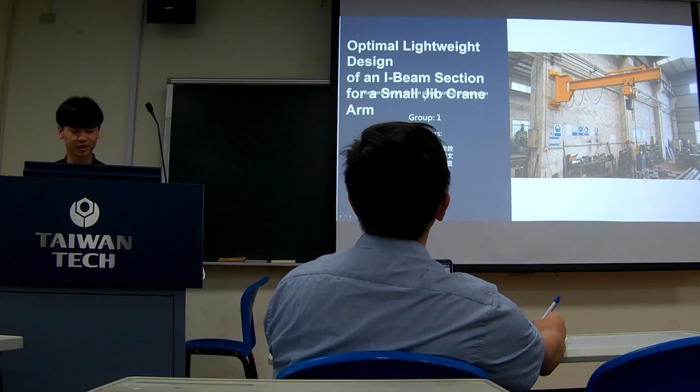Small jib cranes are commonly used in factory and repair areas and workstations for lifting and moving parts. However, if the crane arm is over-designed, it increases material cost and also increases the load on the column and rotating base. On the other hand, if the arm is under-designed, it may cause excessive stress or tip deflection. So the goal of this study is to reduce the arm weight while keeping the stress and deflection within allowed limits.

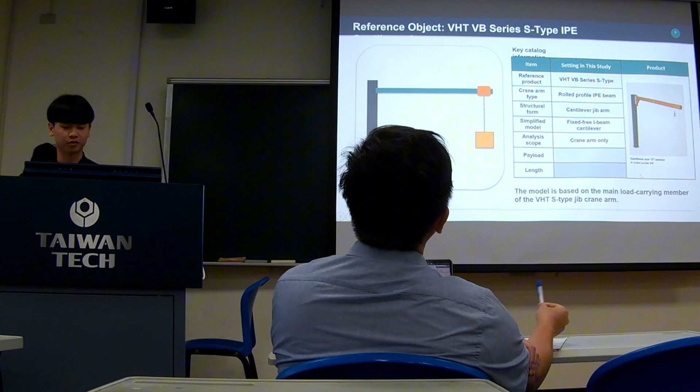To make the problem closer to a real engineering case, this study refers to the VHT VB series S-type jib crane frame. According to the catalog of this frame, the S-type arm is a cantilever beam made of rolled profile IPE, and the trolley runs along the IPE beam. So this beam can be regarded as the main load carrying member of the crane arm. Therefore, in this study we only focus on these horizontal IPE arms and simplify this as a fixed I-shaped beam cantilever.

The complete jib crane frame includes many components, such as the column, rotating support, trolley, hoist, bolt, and wheel. In this proposal we simplify the system and focus only on the crane arm. The column or wall support is treated as a fixed boundary. The lifted load is modeled as a concentrated load, and the beam self-weight is modeled as a uniform distributed load. This simplification allows us to build a clear analytical model for optimization.

Next, we define the loading model. For a cantilever beam, when the load is moved further from the fixed end, the bending moment and tip deflection become larger, and therefore the trolley and the hoist are assumed to be located at the free end. This represents the worst case loading condition.

Based on jib crane frame design guidance, the design load includes the rated lift load, plus 15% of capacity for trolley and hoist weight, and 25% for impact allowance. Therefore the equivalent end load is defined by the formulation shown.

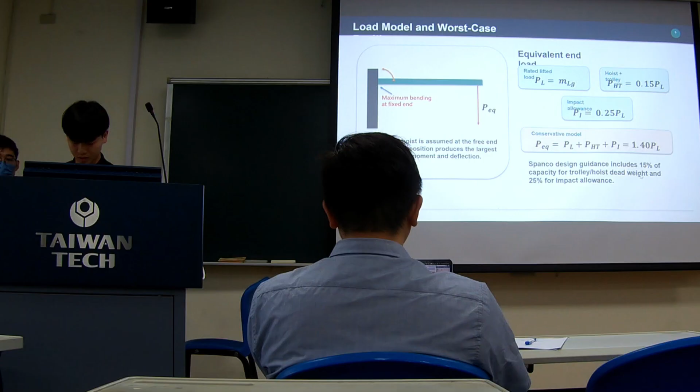After defining the load, we define the design variables. The I-shaped beam section is described by four main geometries: section height h, flange width bf, flange thickness tf, and web thickness tw. These variables directly affect the cross-section area, moment of inertia, and bending stress.

The cross-section area and moment of inertia equations are based on the standard composite area method for I-shaped sections. The I-shaped section is divided into two flanges and one web, and the moment of inertia is derived from the standard rectangular moment of inertia formula. Therefore, these equations are used as the geometry basis of the optimization model.

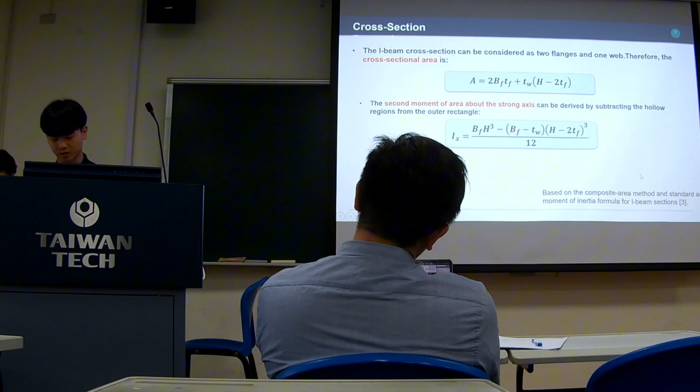The beam weight equation is based on the basic mass density volume relationship. Since the material density and beam length are given, the beam mass can be calculated from the cross-section area, and the self-weight of the beam is then modeled as a uniform distributed load along the arm.

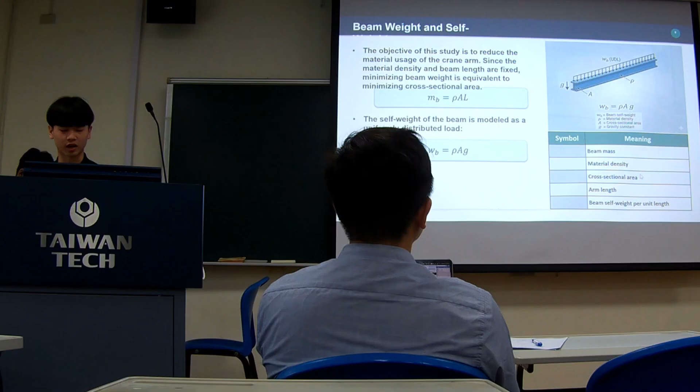The stress equation is based on Euler beam theory and the standard flexure formula. Since the beam arm is simplified as a cantilever beam, the maximum bending moment occurs at the fixed end.

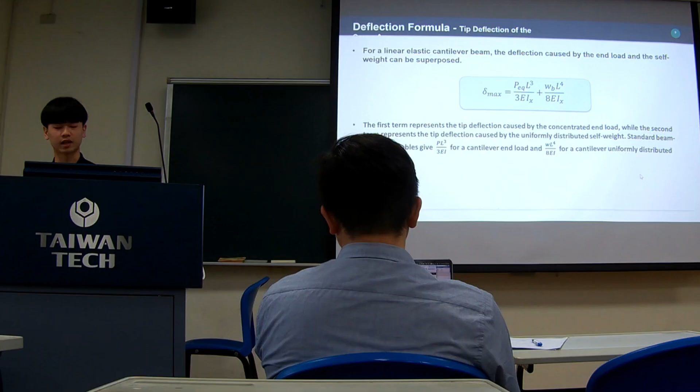The deflection equation is based on the standard cantilever beam deflection formula. The first term comes from the concentrated end load, and the second term comes from the uniformly distributed beam self-weight. Because the model is assumed to be linear elastic, the total deflection can be added by the superposition principle.

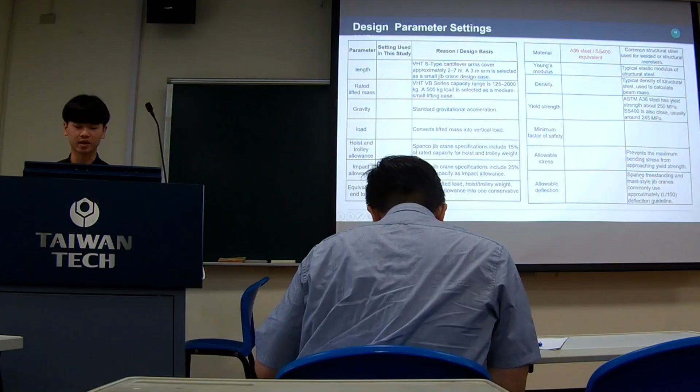This page shows the numerical settings used in this study. The arm length is set to 3 meters because the VHT S-type arm length range is about 2 to 7 meters. The rated lifting load is set to 500 kilograms, which is within the VHT capacity range, representing a medium-small lifting case.

The solver used in this study is sequential quadratic programming, or SQP. This problem is a nonlinear constrained optimization problem. The design variables are nonlinear, including h, tf, bf, and tw. The objective function and constraints are also nonlinear because the moment of inertia, stress, and deflection all depend nonlinearly on the section dimensions.

So SQP is suitable for this type of problem because it is designed for continuous nonlinear optimization with constraints. Compared with random search methods, SQP is more efficient for these small scale engineering design problems.

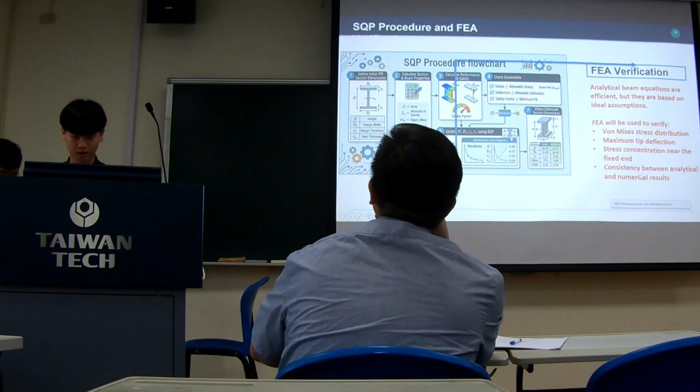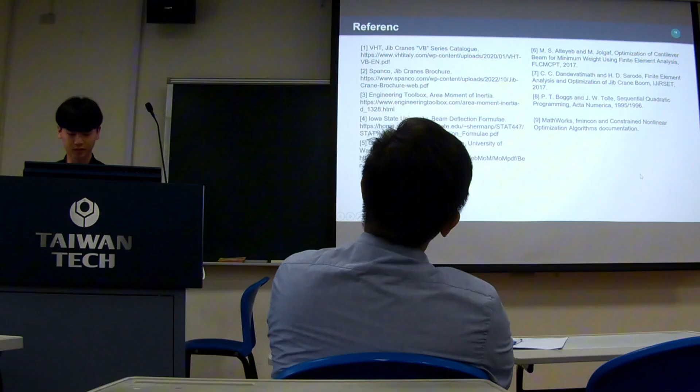We expect the result is that the linear-optimized I-beam arms will have a lower mass than the original design. However, after optimization, the... calculating the reliability of the optimized design. This is our reference. Thanks for listening.

Of course, this is a problem that you can solve, but I think it's a little simple because for I-beam geometry, there are already given equations. So if I have those equations and put them in MATLAB, I can complete this within an hour, right?

So I think it's a little simple. Since you are interested in structural optimization, I recommend you look into something called topology optimization. In our lab, we have software called HyperWorks. I think Shanisa is using it. That software has topology optimization.

Topology means towards geometry. So topology optimization is a kind of method that will generate a very unique design, like art. So you can Google for it, and there are actually some free software options on the internet.

The design is strictly regulated by international ASME standards, and rigid safety margins often led to over-designed structures. Our goal is to minimize the overall cost while ensuring 100% compliance with non-linear safety requirements.

To define the problem, we have a design vector X composed of four variables: X1, X2, X3, and X4. X1 is shell thickness, X2 is head thickness, X3 is inner radius, and X4 is cylinder length. X1 and X2 are discrete variables, while X3 and X4 are continuous.

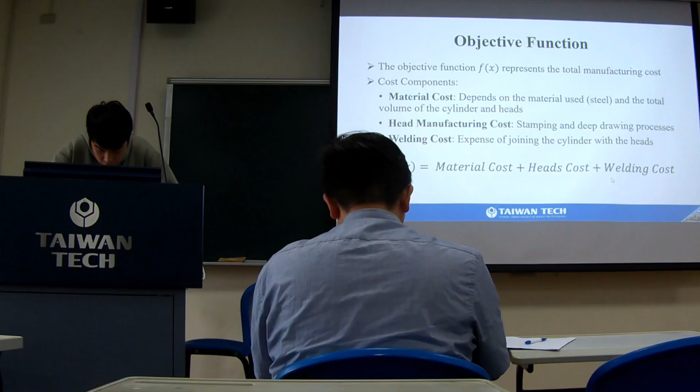Our objective function represents the total manufacturing cost. We've broken it down into three primary factors: the material cost, which depends on the volume of steel; the head manufacturing cost, which involves the stamping process; and the welding cost for assembly. So minimizing the function f(x) is our primary goal.

This is the table we use. This table sets up industrial benchmark parameters to connect our theoretical model to a computable simulation, and these are fixed parameters from Sandgren's study.

We use C1 to C4 in our cost equation. C1 is the shell material factor, C2 is the head forming factor, C3 is the welding factor, and C4 is the circumferential weld factor.

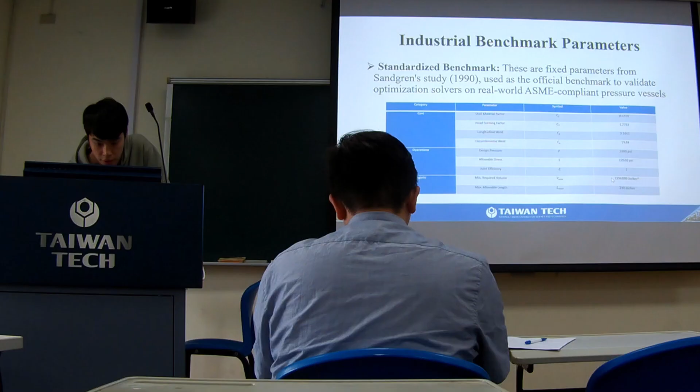To make the problem computable, we adopted the industrial benchmark parameters established by Sandgren, and by substituting these coefficients into our model, we derive the exact cost function shown here. This formula allows our solver to evaluate the exact cost for any given point in the 4D search space.

We also have some design constraints, and these four constraints are non-linear. The first two, G1 and G2, are derived from the ASME resistance formulas to prevent failure under external and internal pressure and stress. G3 ensures we meet the minimum operational volume requirement, and G4 is about the maximum allowable length for transport logistics.

For the solver, we decided to implement Particle Swarm Optimization, PSO. That's because classic methods like Newton's method or steepest descent fail, since this problem has both continuous and discrete variables. Particle Swarm Optimization fits this problem well, and also because PSO doesn't need gradient information, this method is robust, efficient, and suited for exploring this complex search space.

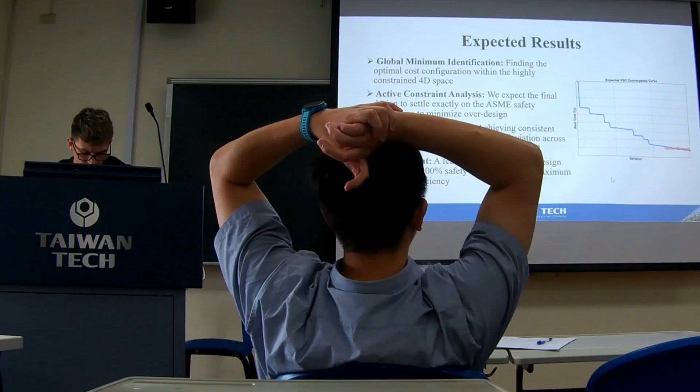We expect to identify the global minimum cost, and the optimized design reliably settles exactly on the boundaries of the shell, satisfying the constraints we explained before. This means we will eliminate all unnecessary material weight while maintaining the exact safety factor required by the code.

Can you move back to the prior formulations? One more.

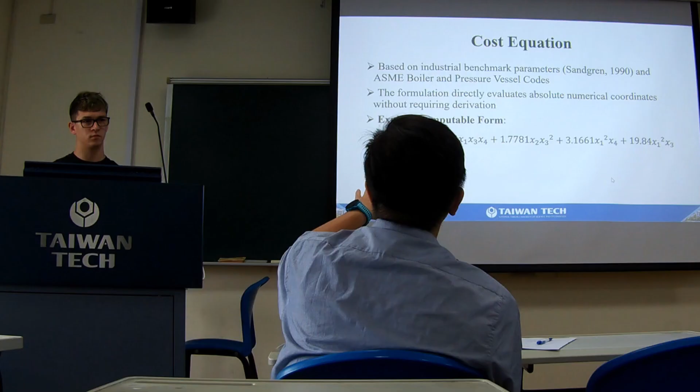So all of your X variables are basically geometrical parameters. And from the objective function, it's a very nonlinear problem. Let's go to the next page.

So these are some physical constraints. Some of them are nonlinear, some of them are just linear equations. Please go forward. So from here, your statement — the first statement isn't quite appropriate for your slide, because you mentioned that a gradient-based approach is not good for discrete variables. But in your problem, is there actually a discrete problem?

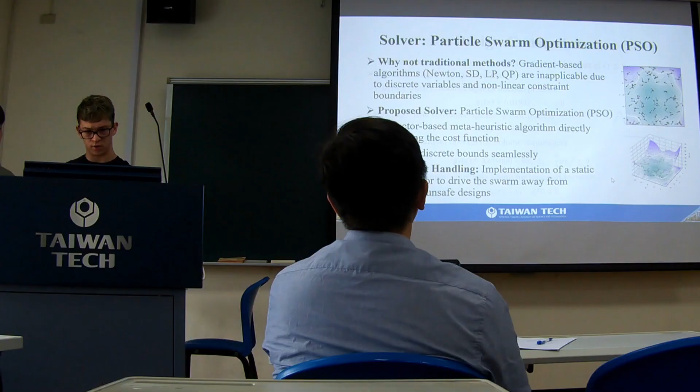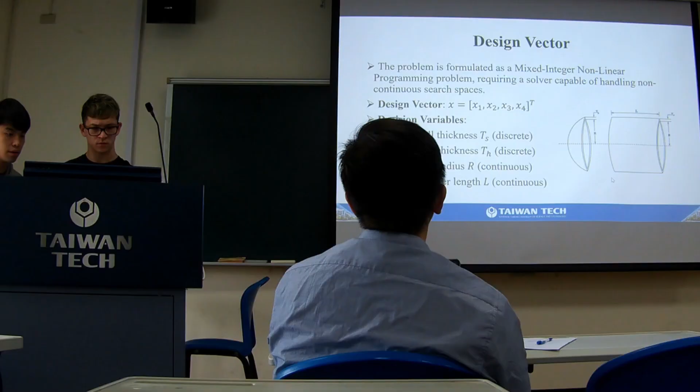No, the first two are discrete. Can you show the first two? Shell thickness and head thickness are discrete because they follow commercial sizing — you can't buy every size you want, you need to buy from fixed sizes. Then the inner radius and the length are continuous.

Yeah, but thickness is something that you can solve as continuous. This problem can easily be treated as a continuous problem. For example, if you're designing gears, the number of teeth is definitely discrete. So usually when people solve this kind of problem, they just treat everything as continuous, and then once they find the solution, they choose the closest valid value.

In your optimal design, for every x1 and x2, you'll have one design that's slightly thicker and one that's slightly thinner, so you're not sure if rounding up or down will violate the design constraints. But once you get the optimal continuous x1 and x2, you can try four different combinations — maybe some will violate the constraint, but some won't, so it can be easily solved. With that consideration, this problem becomes quite simple.

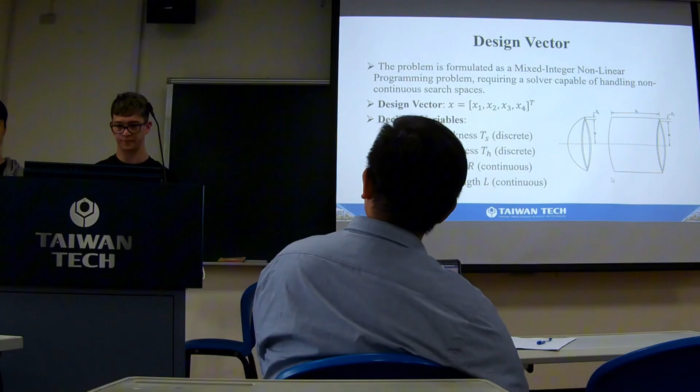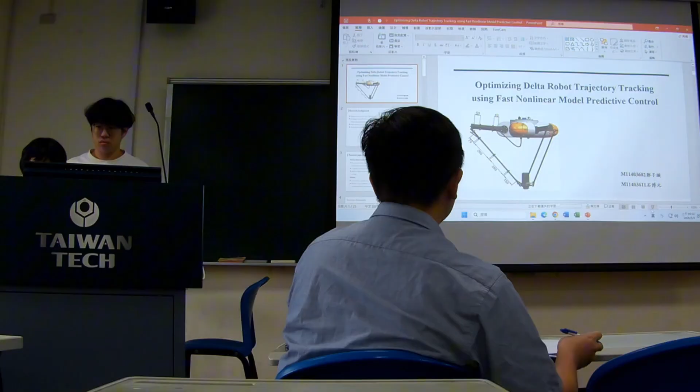Our topic is about optimizing Delta robot trajectory tracking using nonlinear model predictive control.

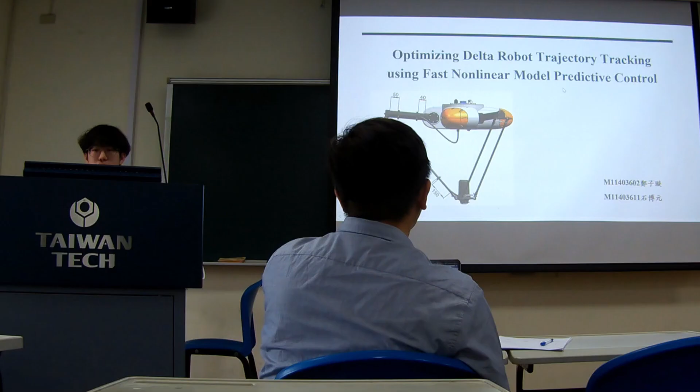So a Delta robot is a type of parallel robot. Unlike traditional serial manipulators, the Delta robot design has all driving units mounted on a stationary overhead base that drives the moving endpoint at the end via a closed kinematic chain. By fixing the drive motors to the stationary base, the moving part does not need to carry the weight of the motor itself, and this design significantly reduces the inertia of moving components, enabling the platform to achieve high movement speed and acceleration, making it the ideal choice for high speed pick and place operations in industry.

However, the mechanical structure of this closed kinematic chain is accompanied by strong nonlinear characteristics and high cross coupling between axes. This means that the dynamic response of the machine is not only nonlinear, but the forces acting on the various motors also mutually constrain and interfere with one another.

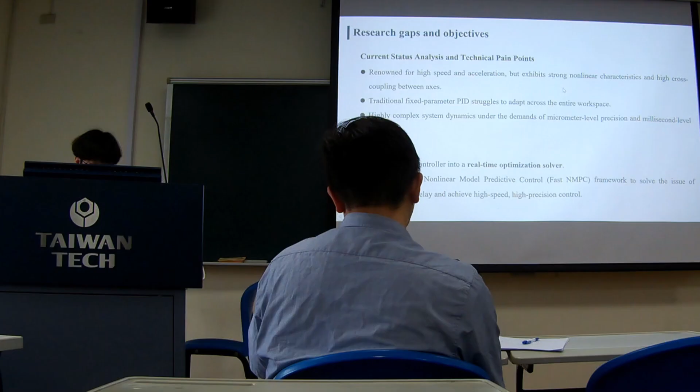Based on this research gap, the objective of the study is to transform the controller into a real-time optimization solver, and furthermore, through systematic improvement, we aim to develop a fast nonlinear model predictive control framework to solve the issue of computation delay and achieve high precision control.

First, we address the inverse kinematics modeling of the Delta robot, and the intersection circle model with a geometric function approach is adopted for solving, because the end effector of the Delta robot is restricted to pure translational motion. The end of the elbow joint must satisfy two conditions. First, it must lie on a circular trajectory with the upper arm length as the radius and the motor axis point as the center.

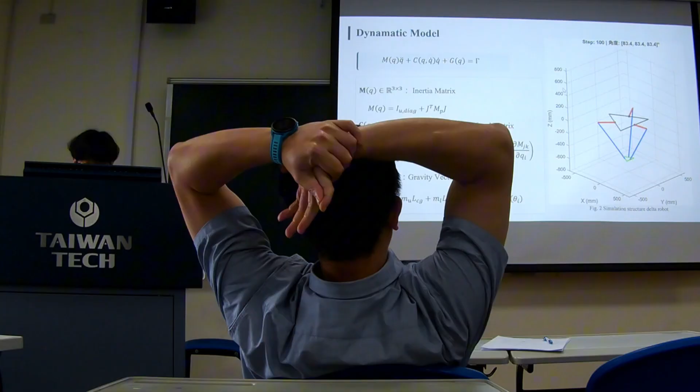The right side of the equation is gamma, representing the total torque output. The left side represents the various physical forces generated during the robot motion. The inertia matrix M(q) is a square matrix composed of real numbers, representing the robot's resistance to acceleration and deceleration in its current posture.

I is the moment of inertia of the active arm and the motor rotors itself. M_p is the mass matrix of the moving platform, and the Jacobian matrix is used to map the end effector's movement back to the inertia in the joint space.

The second term is the Coriolis and centrifugal matrix, which represents the dynamic coupling and interpolating forces generated when the robot moves across multiple axes at high speed. Its matrix elements are composed of the joint velocity and coupling coefficients.

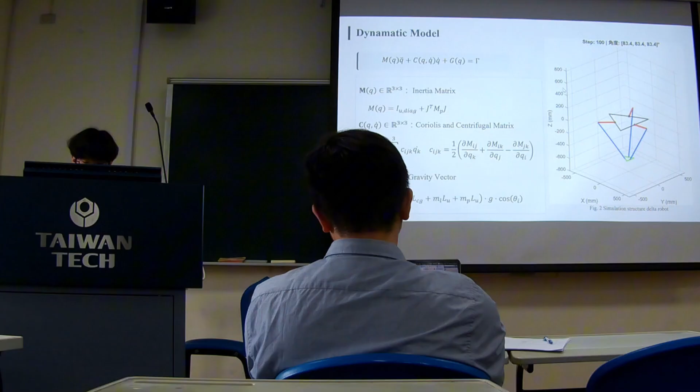So the image is the 3D visualization of the delta robot and dynamics simulation, created using numerical simulation software such as MATLAB. It is a visualization combining the inverse dynamics and dynamic model in the code. The step of 100 indicates that this is the moment captured, 100 times in the simulation, showing the angle between the current rotation angle of the three motors.

To achieve real-time optimal control, we transform the trajectory tracking task into a multi-objective optimization problem subject to constraints. We design a multi-objective cost function encompassing three sub-objectives, and the first one is the tracking cost.

The goal of this term is to optimize the error between the actual position of the end effector and the reference trajectory, forcing the controller to maintain extremely high spatial precision.

The second one is the stability cost, by analyzing the force variation between adjacent time steps. This term prevents the controller from outputting drastically jumping commands, effectively suppressing high frequency mechanical vibration prone to occur during high speed operation, thereby improving the system's dynamic stability.

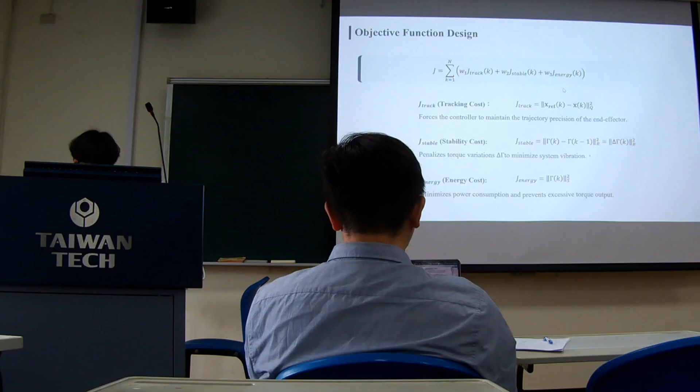The third one is the energy cost, by penalizing excessively large absolute values of the force output. This term prevents the motors from consuming excessive electrical energy during discrete corrections, achieving the goal of reducing power loss and extending the lifespan.

Based on the hardware specifications of the delta robot, we incorporate the following limitations into the MPC model as constraints to ensure the feasibility and safety of the optimization results.

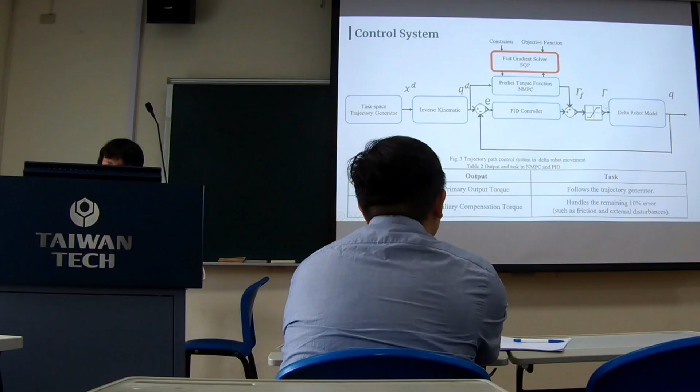The executive operator gets the current input and runs various optimization iterations to predict the torque function. Then the torque function output goes to the dynamic model.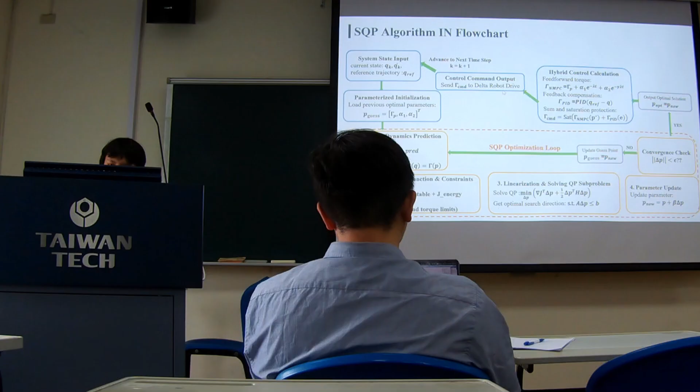So it sets the range and gets the final output to the main control base, feeding it back further while checking values like in the paper, every time checking and minimizing errors in every condition, as expected in the paper.

Very good and complete presentation. It seems like you already searched for a lot of information and even showed some results. My recommendation would be to add a little complexity to the problem.

There are some researchers who use Delta robots to do machining, like drilling. If you have a drill and a tool tip doing drilling, there will be reaction forces from the machine causing problems for the robot. Think about that kind of scenario to make the system harder to control, so your optimal control method or optimization can handle that situation.

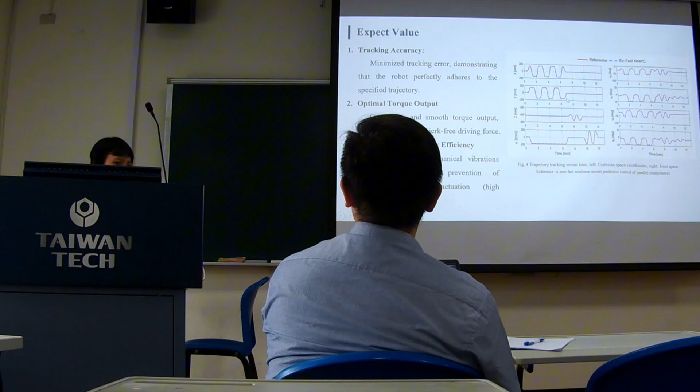For the rest of your presentation, I think it's very complete. Since it's already complete, you can move on to think about the challenge. Okay, thank you.

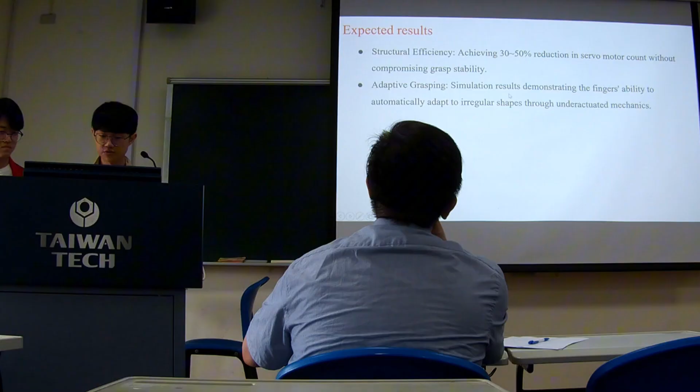Our expected result is achieving 30 to 50% reduction in servo motor count, and we simulate to demonstrate the previous results, showing that the irregular shape is better.

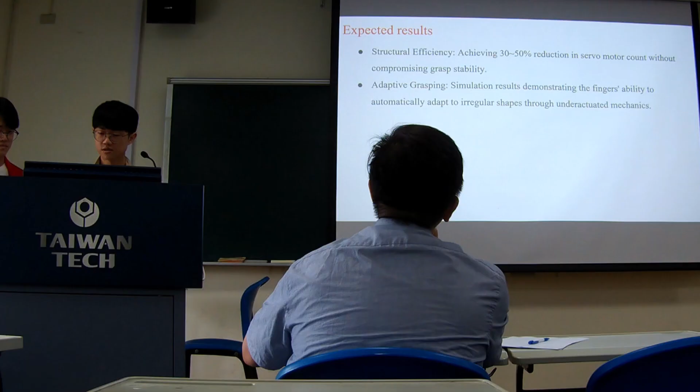Okay, can you go back to your formulations? For your constraints, I think you need to define the lower and upper limit of your dimensions. Because if you try to minimize the torque, and the radius and length are zero, then you have zero torque, but that's meaningless. So I guess you may want to have an upper bound and lower bound for your variables.

And for your constraints, you have target radius and target contact force. So if you are grasping different objects with a different radius, your variable will be different, which means it's a new design. In reality, you cannot do that—you cannot change a robot hand, right?

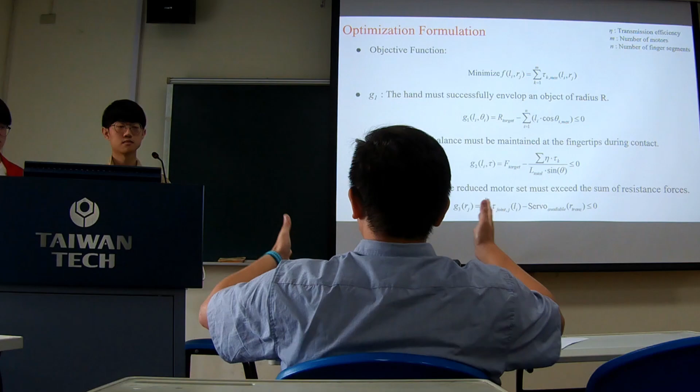For example, you are trying to grasp multiple kinds of objects with different sizes, different weights, different properties, and for all scenarios you have to have successful grasping. So maybe you have a lot of target constraints. It's okay to have many constraints—many of them will not be active, only some of them become active. That's fine, let the optimization handle it.

If you can find more and more scenarios and consider them at the same time, then you will be designing a robot that at least satisfies all grasping conditions. Let's see what happens—then maybe it's more interesting.

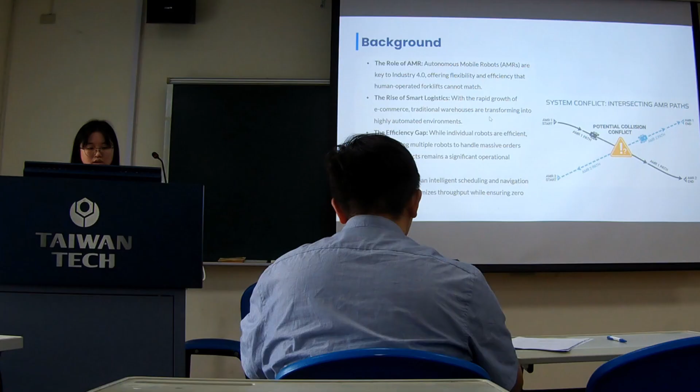While individual robots are efficient, when multiple robots work together we need to find out how to coordinate them. So our goal is to develop an intelligent scheduling and navigation system that can maximize throughput while ensuring zero collisions. Today we are going to use PSO to find the best task assignment.

PSO uses swarm behavior to find the best positions. We have rules, and each agent will have an experience position and a best position. It will find the best way to go to the best position, and then we combine this with A-star.

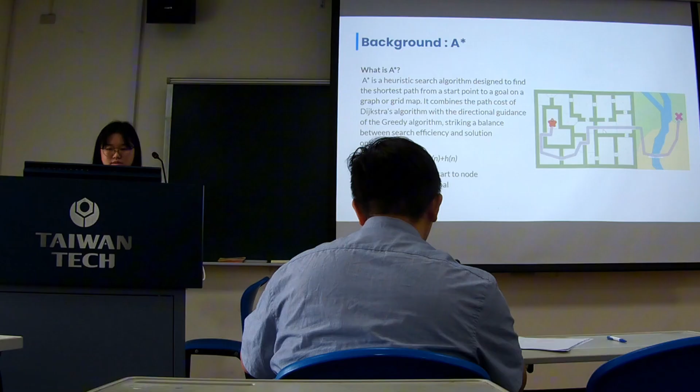A-star can find the best route in the maze, and then it can find the best path.

Our problem is: if we have two AMRs starting in the industry, and we have 10 orders split into five tasks for each AMR, they need to find the smallest time to finish the 10 tasks. The challenge is to make task assignment and task planning work together to find the best completion time.

So you will have two decision variables. One is the assignment matrix, which we find first, and next is the order sequence of the AMR. Then we find the maximum time needed, which depends on the length the AMR uses and the velocity, giving us the running time.

So our solver uses PSO, then assigns the task assignment, and then we code A star to find out which is the best path to have the best answer.

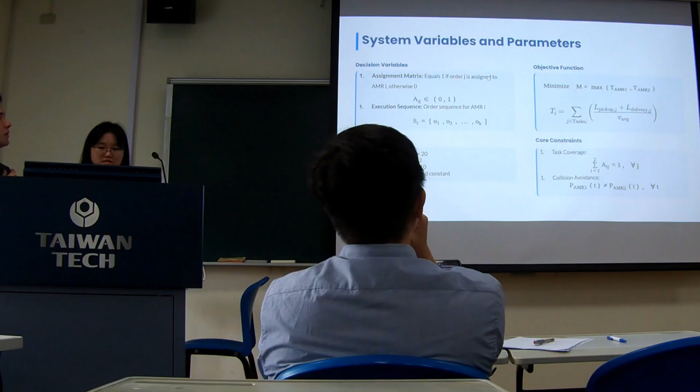Let's see your formulation, the problem formulation. Maybe consider 3D. I'm not sure.

If you consider 3D, or does it have a continuous task applied, like there's a new task? Because this is already well developed, I'm just trying to think of something interesting. I'm not sure what's the new problem to be solved.

You are making it even simpler—it's grid based. Grid based is even simpler, right? Can I suggest something?

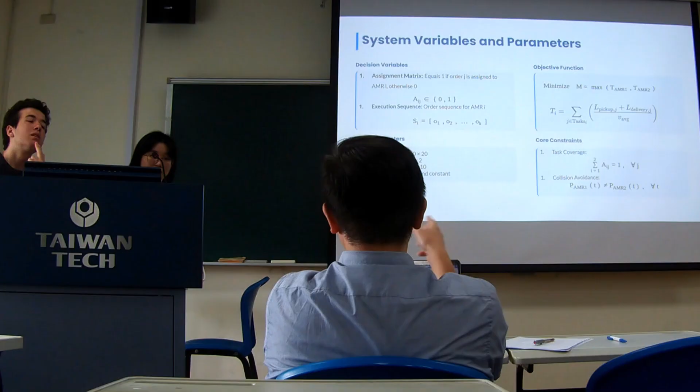So is there any random person in the problem? No person—only AMR, not person. But maybe if you have a random person walking around, then it's a little interesting. Maybe you can program the person to randomly walk, move around, not just simple linear moving with a linear speed without making a turn—just a very random person.

If that's the case, maybe your AMR has a certain range of observation, so it doesn't know where the person is until it's close enough. Let's say you are 3 steps away from the person, and if you realize you need to get away from that position, you reroute by A star.

When you reroute and start to make a move, the random person moves again, so you need to keep on rerouting. Maybe when you first see the person...

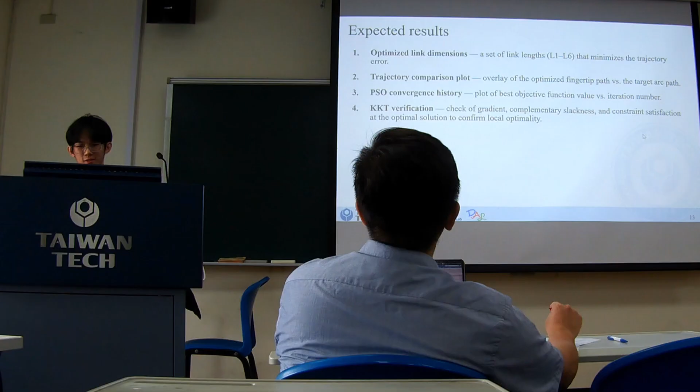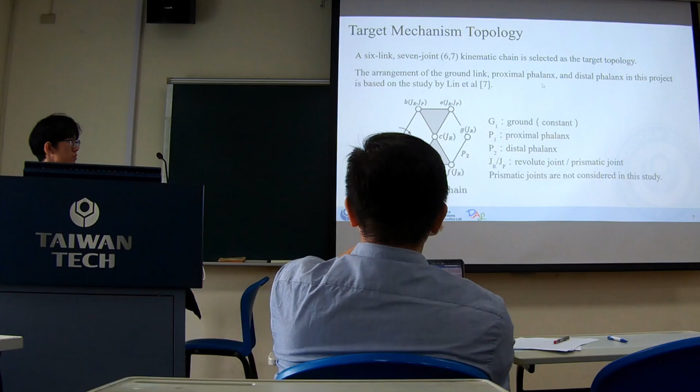Okay, can you show me the design again? So it's a mechanism. Maybe just 2 slides later. So it will be something like this. So you try to design a linkage mechanism that can pass through some desired trajectory. Is that what you're trying to do?

Yes. So if you already have some specific trajectory and you found that mechanism which can pass through that desired trajectory, then your design can only pass through that trajectory. Then you don't have some other motions, right? So are you looking for just a simple one-dimensional gripper, which means controlled by one motor, and just one kind of motion for specific missions? Is that what you're looking for? It's okay to have that kind of design object.

I think so it's really about gripper design, not robot arm, not robot fingers. Yes, because for robot fingers, except for one, this is for like one motor control gripper, and you want the gripper to move in a certain way. But we are looking for only one.

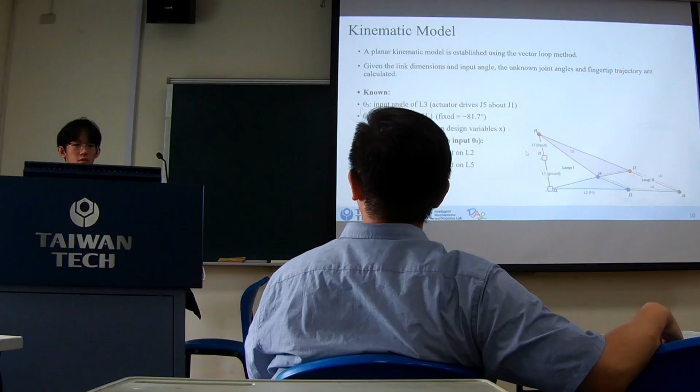We are doing like a quarter arc, so dial. Quarter arc, quarter arc. How about this? If this is solved, you can use it as example one, and then you can design another desired target, see if the mechanism changes. So you can show multiple target paths and just have fun with it and see how the geometry changes.

So sometimes you may want to have not an arc movement, maybe you want more like a linear motion or some other kind of motion, and maybe your mechanism can do that. So just get this one done first, and if you still have time, you can try something else. Okay? Great, let's continue.

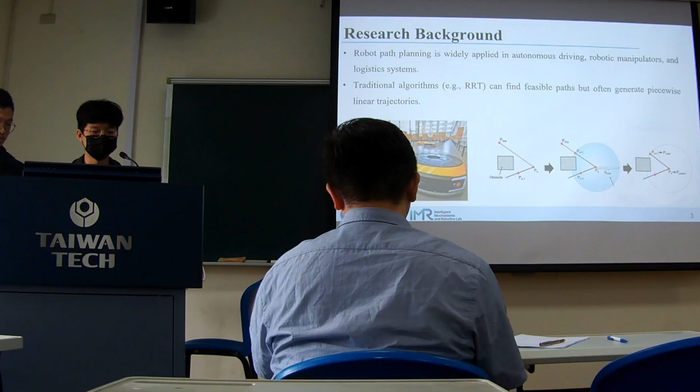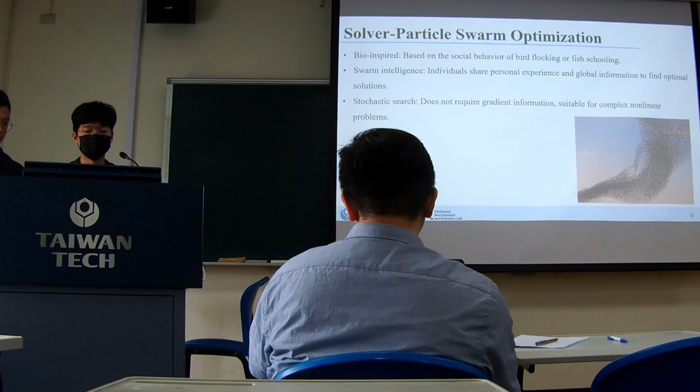The solver is PSO, and PSO is a bio-inspired algorithm based on the social behavior of bird flocking and fish schooling. The swarm intelligence shares individual personal experience and the global experience to find the optimal solution.

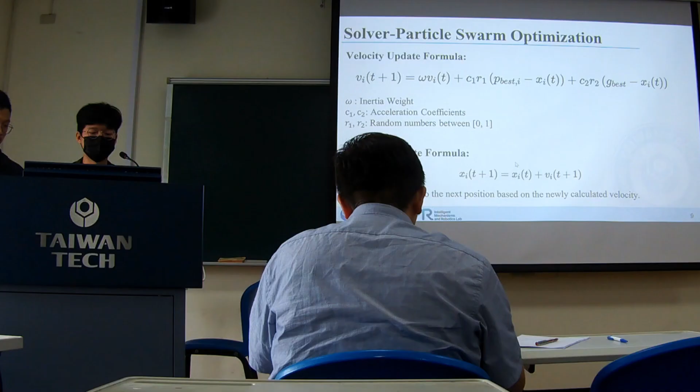And this is the PSO formula. We can see omega is the inertial weight, and C1, C2 are the acceleration coefficients, and R1, R2 are random numbers. We use this to update the position of our point. We can see xi is equal to xi plus vi of t plus 1.

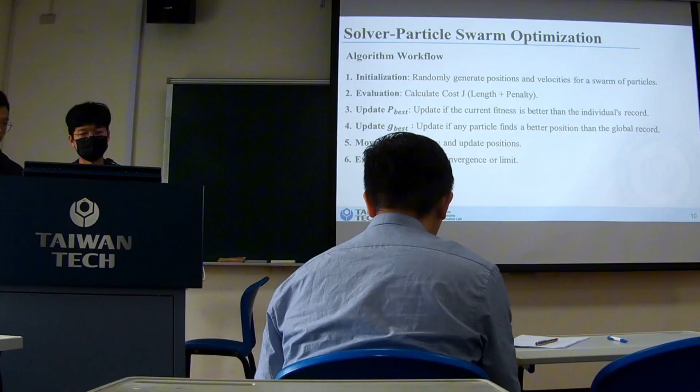And this is our workflow. Initially, we will set down some points and velocities. Next, we will evaluate J. Next, we'll update P and G, and move to a new position and change the velocity. Next, if it converges or hits the limit, we will exit and output the result.

And to ensure the robot will not collide, we will build the margin d safe, and we will improve the particle search division to achieve faster convergence and fewer iterations. This is our reference.

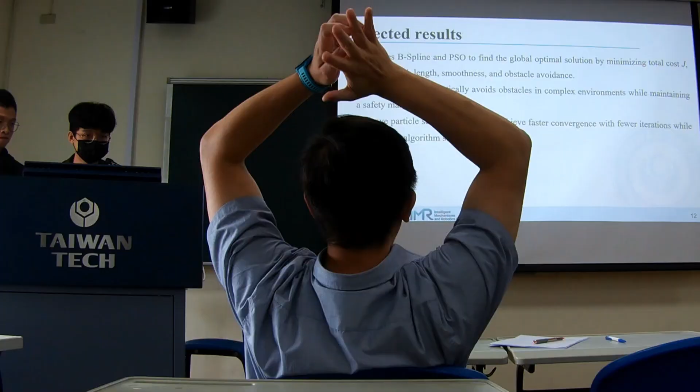Can you go to one of your simulation slides? So you are moving on pixels, right? Yeah, it's the setting. So your grid is a pixel grid, on the top, yeah. You are moving on pixel accuracy. I think this is to set the environment. Yeah, so okay, you are moving on the pixel.

I know there is a problem, I'm not sure if your team can handle it. There is a kind of problem called collaboration between multi-robots, especially for moving one object together. Let's say two people are moving a box, a big box, and one person holds this side, the other holds that side. So like moving a sofa. When they're moving, they need to synchronize their movement, and sometimes around the corner, like parking a car, they need to figure out how to move so it doesn't collide.

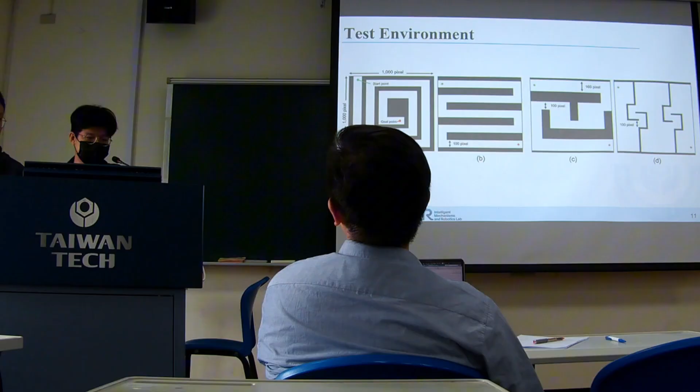When you are working on collision avoidance, you actually handle collision between the object and the wall, right? It's because for pixels, they only overlap then they collide. So for your problem, it's also not easy for them to collide unless you define the collision, the distance d safe, and maybe it will not only be zero. So it's like a safe margin, offsetting everything. Offset the wall, offset the center to a greater size. Then it's the same problem, okay.

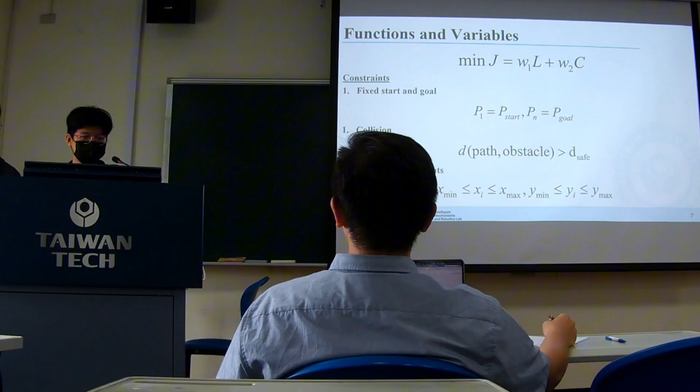About optimal design of heat sink for electronic cooling. Electronic components generate heat during operation. If this heat is not removed efficiently, the component temperature increases, reducing performance and reliability. The goal is to design a compact and lightweight heat sink that keeps the component temperature within a safe range.

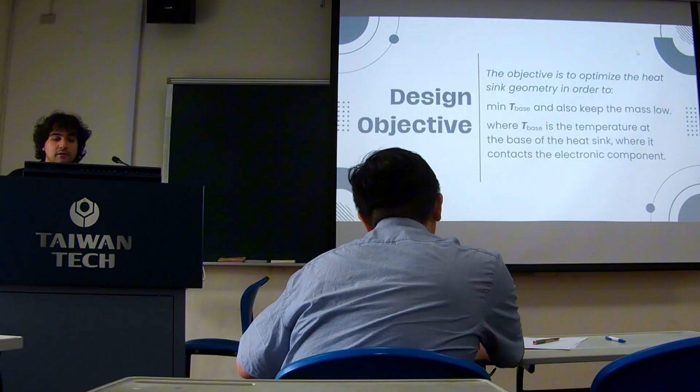The objective is to optimize the heat sink geometry in order to min T base and mass low, where T base is the temperature at the base of the heat sink where it contacts the electronic component. The variables are the number of fins, H defined as the fin height, T is the fin thickness, and S is the spacing between fins. The design must satisfy practical limits: the length, the width, and the mass must not exceed the allowed size for length and width, and for mass, the allowed weight.

The base temperature must stay below the safe operating temperature, and the fin spacing must not be too small because airflow will become restricted.

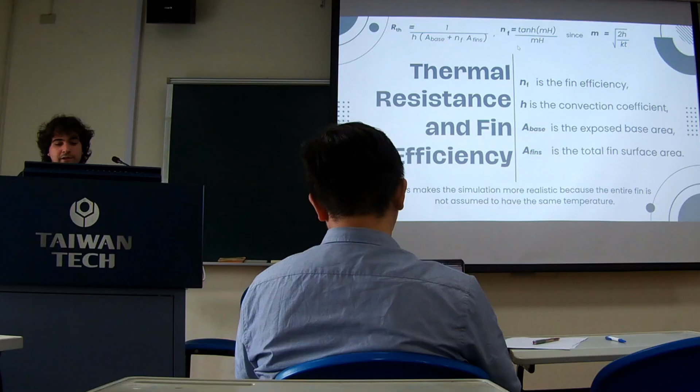This is a simplified physics-based thermal simulation where T base is equal to the ambient temperature plus the heat generated times the thermal resistance of the heat sink. These are the formulas: the resistance formula, the efficiency formula, and M for the efficiency. This makes the simulation more realistic because the entire fin is not assumed to have the same temperature.

So the objective function is this one: J is equal to W1 times the allowed temperature plus W2 times the allowed mass. W1 controls the importance of cooling performance and W2 controls the importance of reducing mass. This means the algorithm searches for a design with low temperature and acceptable mass.

A genetic algorithm is used to optimize the heatsink geometry because the problem has several variables, constraints, and possible non-linear behavior. The genetic algorithm works by creating many possible heatsink designs, evaluating each design using the objective function, selecting the best designs, combining and mutating them to create better solutions, and repeating until the best design is found.

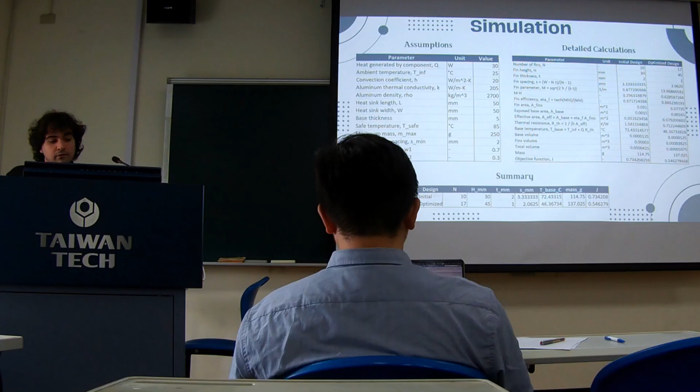So, as you can see, for this test, I select number of fins n equal to 10, height h is 30, thickness is 2, fin spacing s is equal to 3.3, and parameters like m and the fin efficiency are around here. The assumptions like Q, the heat generated by the component, is 30 watts, ambient temperature is 25 degrees Celsius, and this is practically a summary of the initial design and optimized design that I will show later.

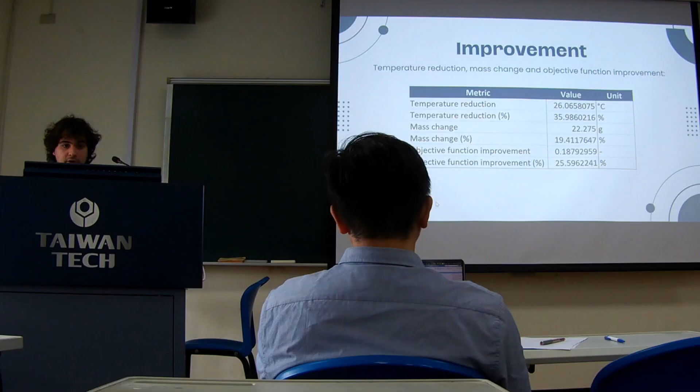And these are the improvements: a temperature reduction of 26 degrees Celsius, a reduction of 35%, and more properties that I will talk about with this graph. So the result temperature represents a reduction in base temperature after optimization of 26 degrees Celsius, or 36%.

The result in mass, as you can see, increased from 114 to 137 but remains below the maximum allowed mass. This happens because we add more fins, from 10 to 17, and reduce the space between them, and increase the height. For that reason, we have an increase in mass of approximately 20 grams.

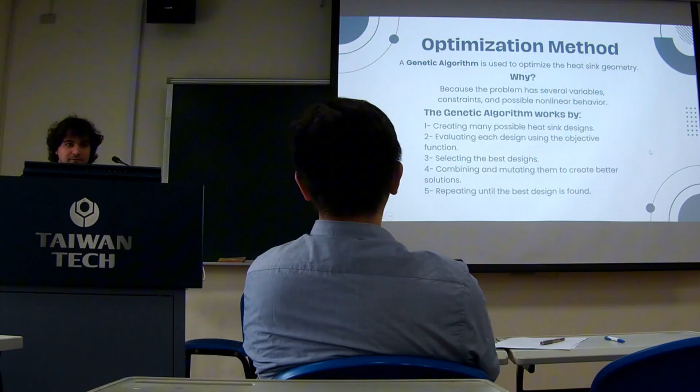Okay, explain to me, sorry. What's your chromosome design? The design chromosome. You use GA, right? Yeah. So what's your chromosome design? Okay, so did you use MATLAB? MATLAB, yeah. Then you don't know the detail inside? No, it's just— Okay, then you have something to work on. Okay.

Why do you use GA? Do you know why you use GA? No. Okay, why do you use GA, genetic algorithm? GA, I just used that because it was the most simple that I found. Say again? It was the easier method that I found because right now I'm with heat transfer and all of that. Okay, so this is related to what I studied. So it's just a random choice, from Google, from the internet. I just found this option and I said okay, I'm sorry, right now heat transfer, so I selected this.

This course is about optimization. So you need to justify why you choose some method, and everything needs a reason. Okay, so I can tell you why.

If you move on to your design report, here, the number of fins is this. So if you use other methods introduced in class, they are continuous methods. GA is good for discrete variables, so it's a good choice. But I want you to know how you design the chromosome, it's related to something called a chromosome.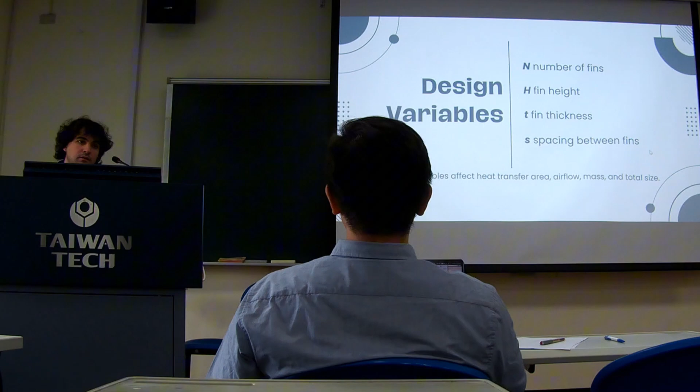So, since this is the beginning of the project, I want you to go back and figure out the details. And can you go to the objective function?

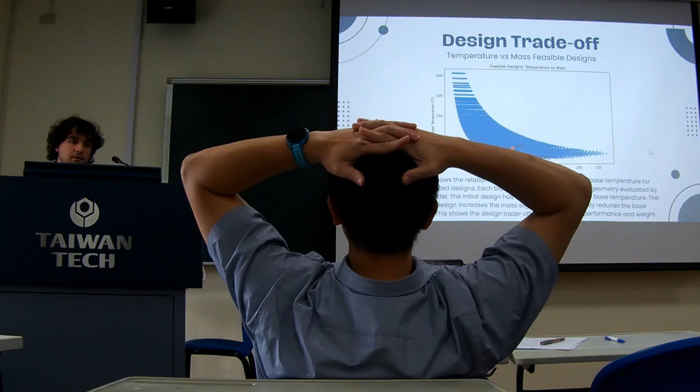Okay, so you have two weighting coefficients. This kind of problem is called multi-objective optimization. I saw your results show a bunch of plots, a bunch of points. Are they design points with different selections of weights? Yeah, different weights, different weights. So in multi-objective optimization, there is something called the Pareto front.

The frontier of all these points on the very left and bottom edge is called the Pareto front, which means all the points on this frontier are optimal solutions representing different weights. The green point is the optimal design with the lowest temperature, and if you move that point to the top left corner, that's the design with minimal mass. So two different things are trading off.

If one day a designer says, okay, let's do 50-50, then the design point will be somewhere in the middle. This curve is called the frontier, and it has a name, the Pareto front. In multi-objective optimization, this front is a collection of all the possible solutions.

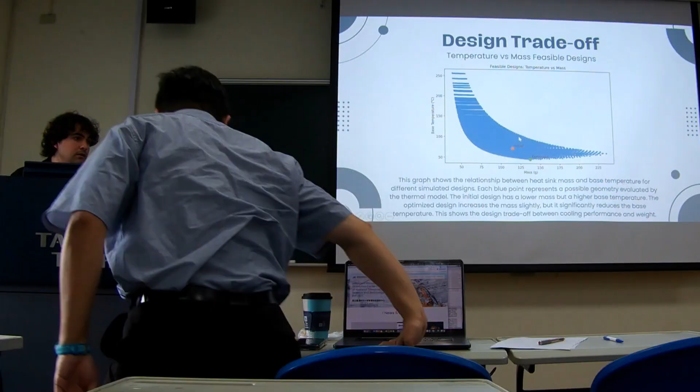When that happens, usually there is a difficulty of choosing optimal because they're all optimal. In this case it's not a straight line but a curve, and all the points on it are optimal solutions. They are a collection of solutions with different choices of weighting coefficients.

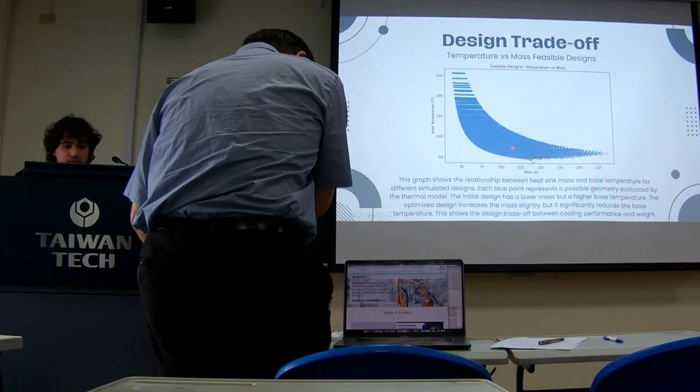Since you bring up this kind of problem, I want you to know that's the solution, so later on you should present it that way and let us know. That's a Pareto front, and there are multiple solutions here. Maybe you can show how the design evolves from one side to the next.

Maybe the one at the top has a lower number of fins, so it's less weight, but it's hotter, or something like that.

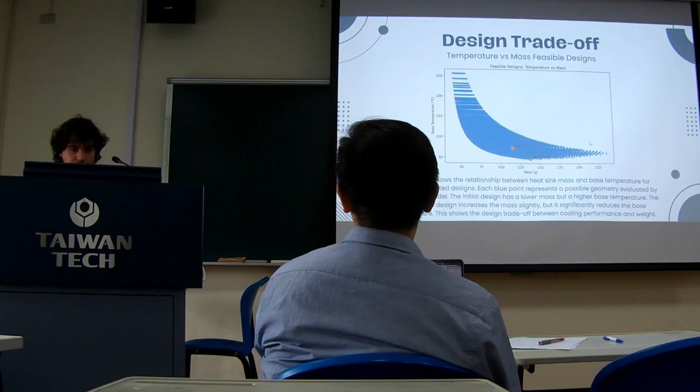Since there are still several weeks, I will suggest you study something and see if you can make this problem more interesting. Okay? Thank you, next.

That was the last one. You're the last one? Okay. Oh, you're the last one. Okay, great.

So I gave you some suggestions, but those are just suggestions. You can consider them or think of something different. The purpose is just to give you some kind of challenge, because when you look for projects, there are a lot of references useful for you, and most of the time those references are already complete results of some complete research.

Nowadays with AI, it's easy to collect known information together and get a report done. I know, so that's why I want you to give yourself a little challenge. Think of something that may not be considered yet in the literature, or only a few people consider. If you challenge yourself, you need to think about how to modify your formulation, how to correct your solver, so you can see different solutions.